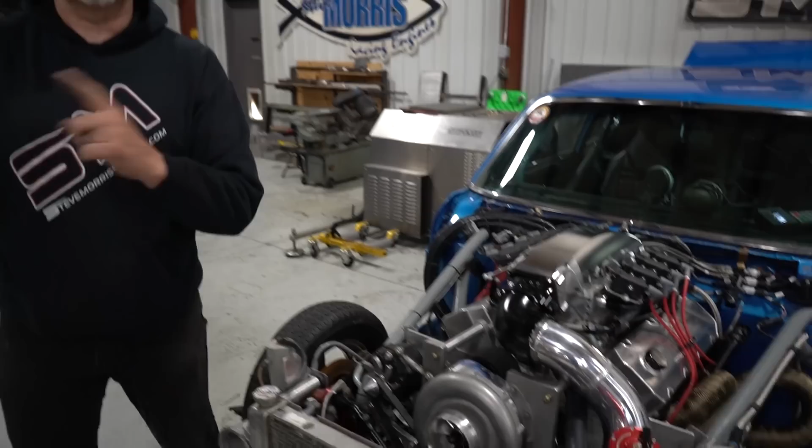This is an engine we already did for Ron Westner. Ron came and picked up the engine off the engine dyno. We did everything - this is an F2 reverse mount 540, and this was a nitrous engine conversion. We'll put a link at the end of this clip so you can watch the actual engine dyno video. Then Ron takes it home and puts it in his Nova. He's had this for a million years - it's his pride and joy, and he does a lot of the work himself, which is pretty cool.

He brings it here, and there's a lot of stuff going on in this car, and he's having some struggles with it - just didn't seem to be running right. It's like, well, you took it with you off the dyno and it's running fine, so there's got to be something else going on. So I said, hey, just bring it over, since you're going to bring it over to have it hub dynoed anyways. We want to take a look at everything and make sure there's no little issues anywhere else. So that's what we've done.

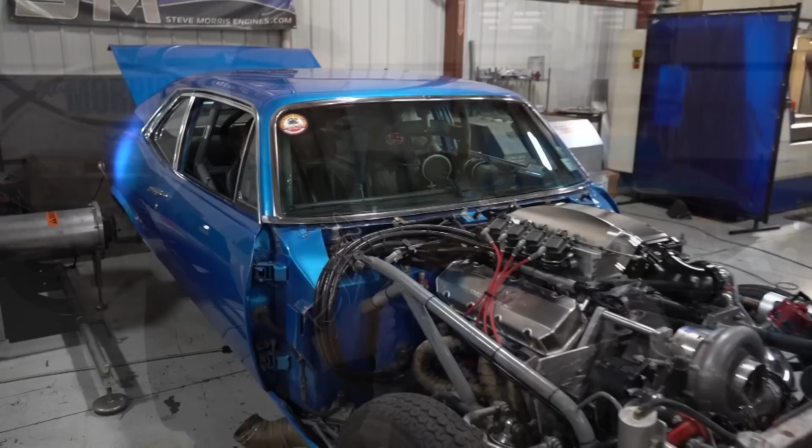This is a 540 cubic inch gasoline engine, C16, intercooled. Like I said, it was a nitrous engine conversion, and Ron brought us this engine with a whole bunch of parts to convert over, including the F2 reverse mount and this intake manifold with the built-in intercooler - a combination sheet metal slash billet intake manifold. Basically this is like our stage 2 package with a different intake manifold than what we'd normally do. F2, solid roller, just a good overall general package. You can check our website to get a gist of what's in a stage 2 package. Coil on plug, Holley EFI.

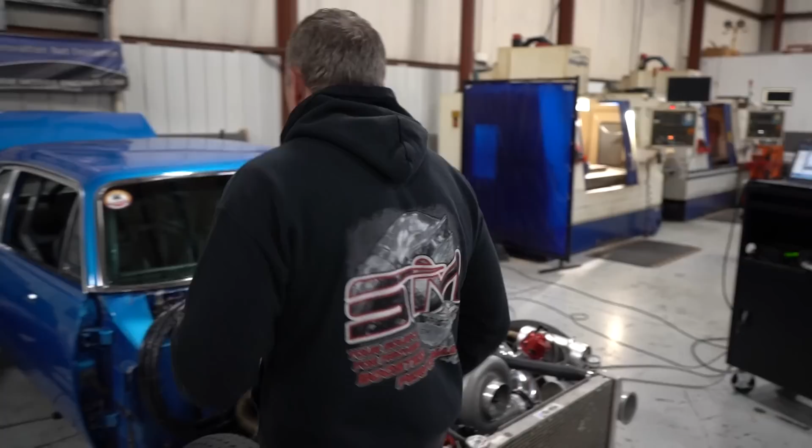You can see there are lines and lines and lines and more lines in this car - a lot of stuff here. So when Ron brought it back to us, I cleaned up a bunch of things. I remade a tube for him, redid the coil mounts, and cleaned up some of the fuel system plumbing and coolant plumbing.

And now we're in test mode, so let's get testing it. We've been going over this and wanted to show you a couple really interesting things. So before you check out thinking this video looks boring - we're going to dyno this thing without a bell in race mode, with the bell in race mode, and then since this is a street strip car and he wants to drive it, we'll run it on a little filter for the F2 we've come up with, so filtered. This also has cutouts, so we'll do open exhaust and then full exhaust out the back. I'm going to show you the differences in horsepower from open headers to bell, full race mode, open headers to filter, and full street mode. Should be pretty interesting, so stay tuned.

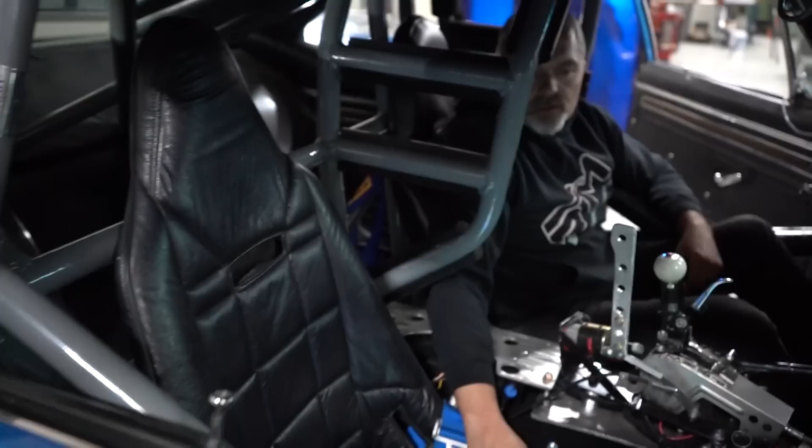Alright, so that was the first pull, open exhaust, no bell. This isn't exactly the way I gave it to him - I dynoed it with the bell on originally. It's the exact same tune-up. All I did is download the exact same tune-up we had before and put the same sensors back in it that were originally there.

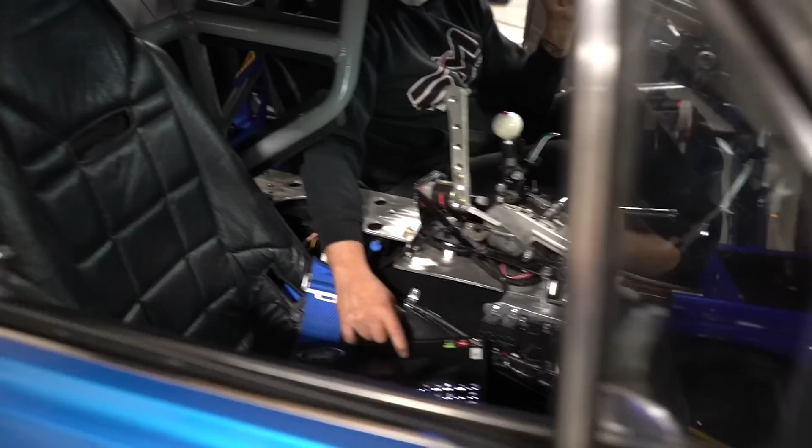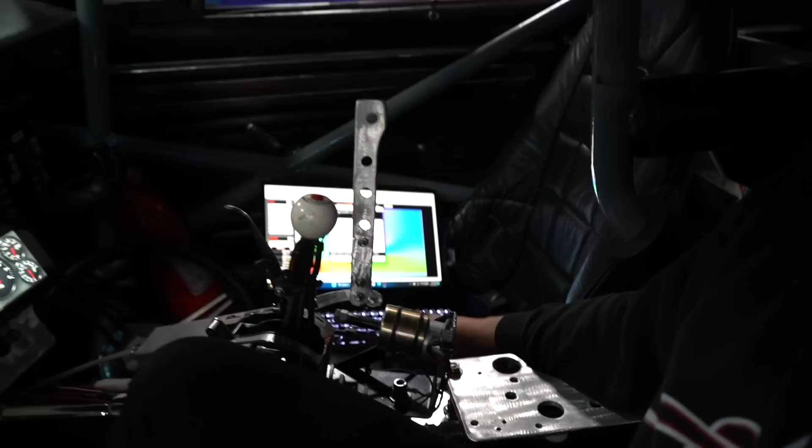Let me download this data log. Open the data log, take a look - you can see up there on the screen, it made 1466 horsepower. I'll show you that in just a second.

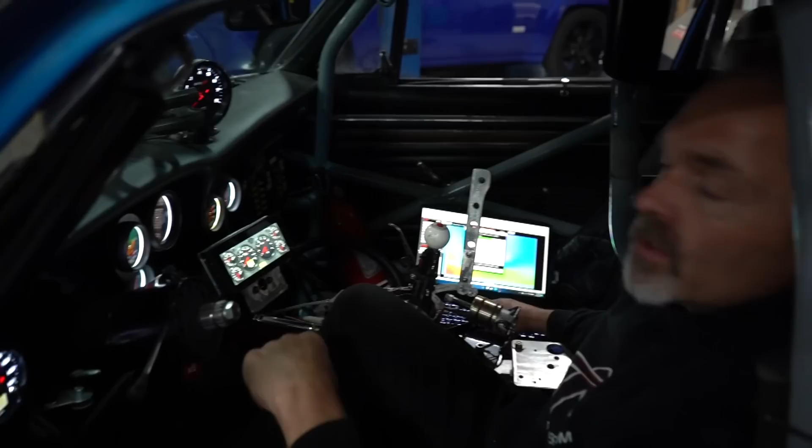So we're going to come out here, put the bell on it, and this will be exactly the way I gave it to him off the dyno.

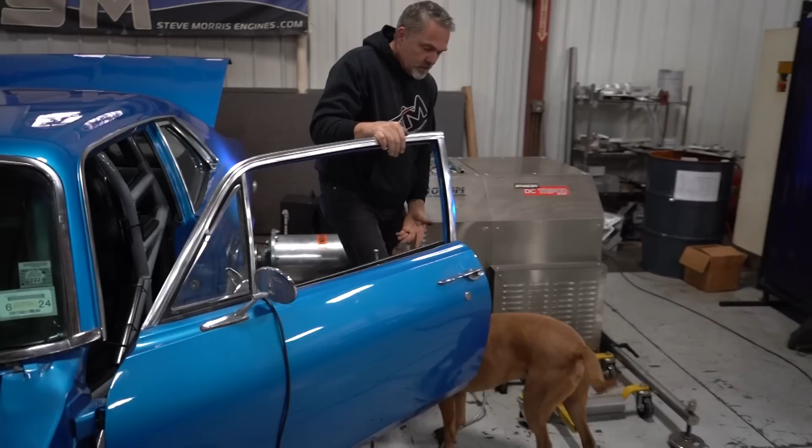Back up, back up - I can't work with you standing here. That's not what you do.

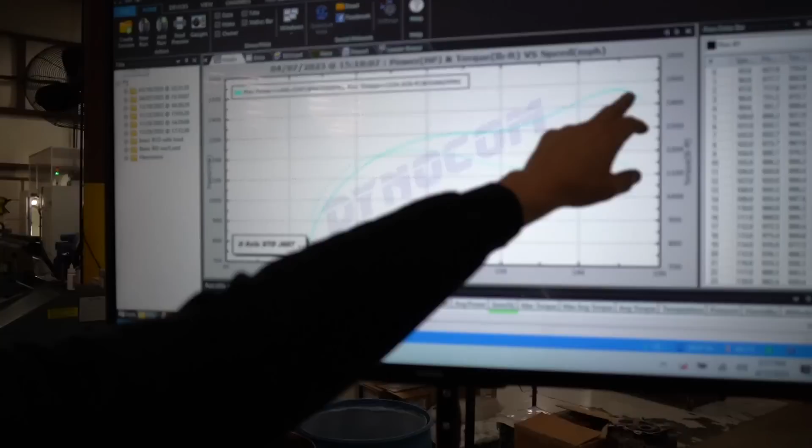Alright, let's see here, there we go - a little up through there. This is probably where the converter and stuff is starting to come through. And this is just me letting off the throttle up there, so that looks right, everything looks good. So let's put this bell on.

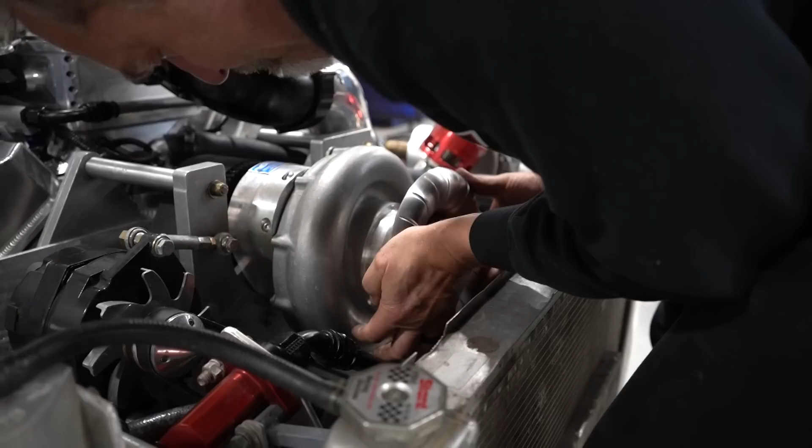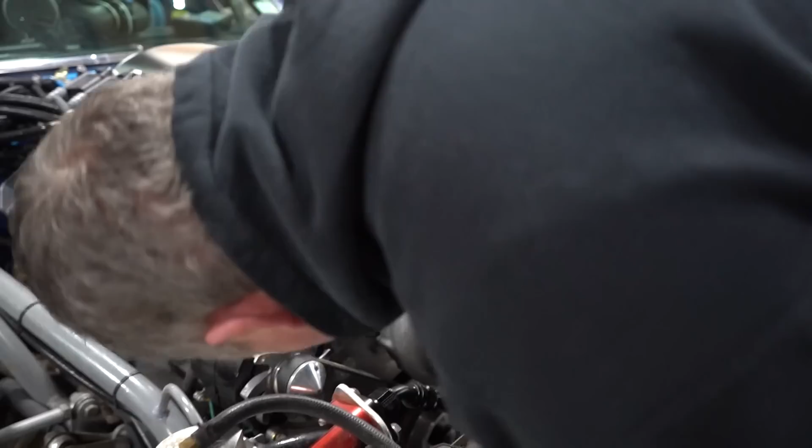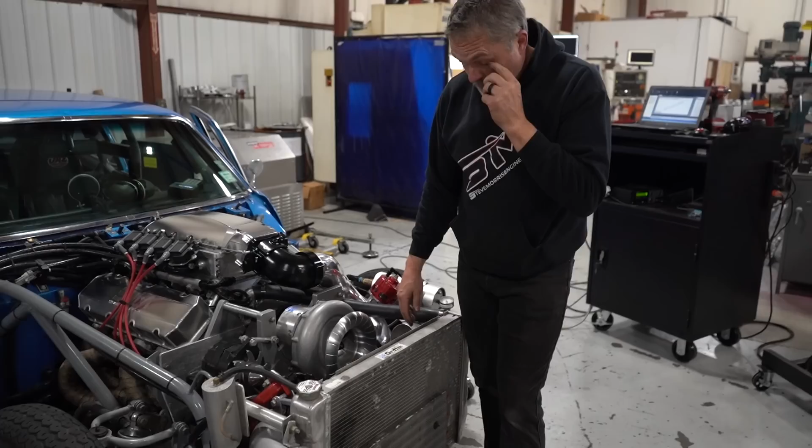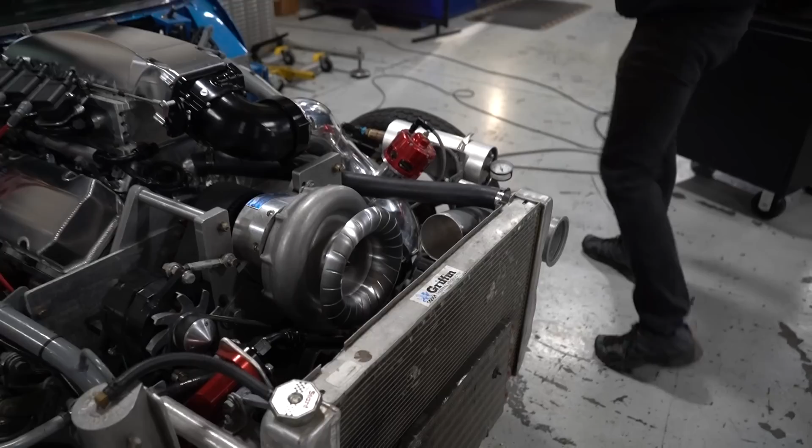Now, obviously this isn't ideal, sucking out of a radiator, but it is what it is. He has some fresh air stuff he's trying to do here. You're not going to get away from it unless you split radiators and do some other stuff, but as he's sitting right now, it is what it is. So no changes - all we're going to do is make a pull with that bell on it.

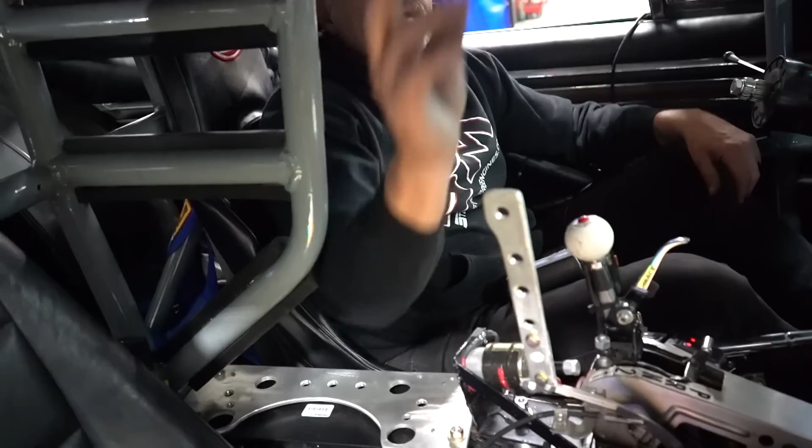So what I just did is I put in a safety for him, and I must have hit it at the wrong number. Ron has both a fast and a slow speed - that's one fuel pump, the race fuel pump. If you forget or just happen to not turn one switch off, or your second switch goes bad, this thing will run with one fuel pump on at low speed and burn the engine up. I don't ever recommend having two-speed pumps on it - anything other than this, don't have it on switches, don't put it into the tune. One pump, just let it run wide open throttle, it's never going to hurt it, no big deal. Or have some kind of redundant thing that's always on no matter what, if it's making boost, something like that.

So what I had done is I set a timing retard on it to enable if it didn't hit peak pressure, and I probably just set it up wrong, because it obviously didn't have any timing in it, and it wouldn't even rev up. So let me download this data log real quick here, and I'll change that, and then we'll make a hit on it.

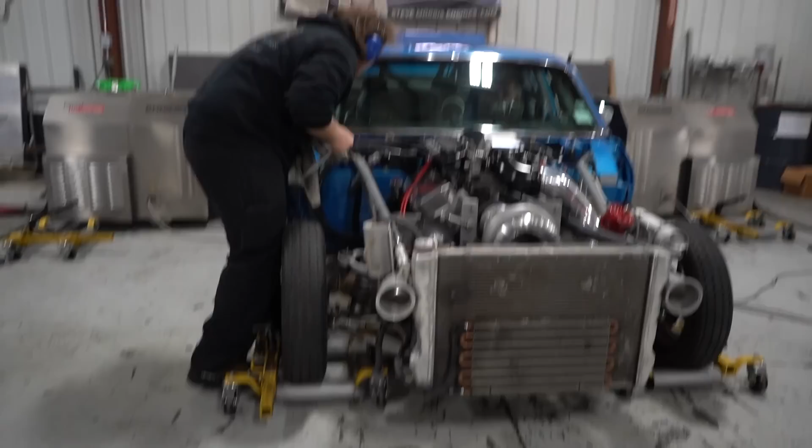Yeah, it's in the middle, not all the way up. It sounds like it broke. Yeah, halfway up, right in the middle. Yeah, it sounds like it broke. Probably transmission.

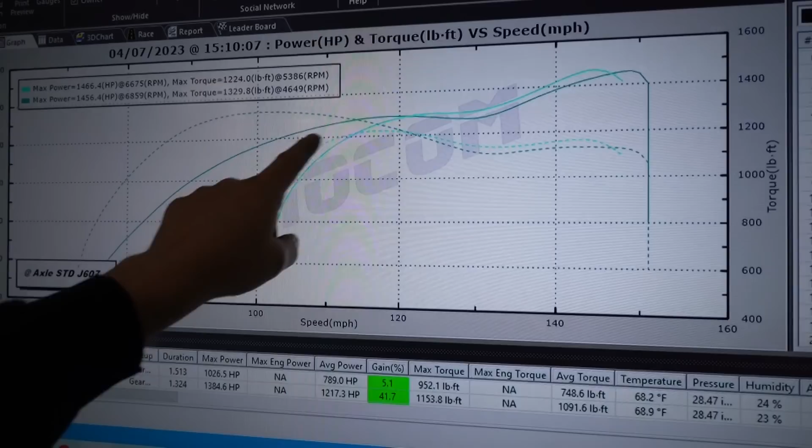Interesting, I'm gonna have to think this through, what's going on here. But with the bell, we had the one deal where the pull just went crazy, and then I came back into it and just made a short pull because, like, oh no, now it's all back again. It didn't come up on the rev limiter. So on that one, it's very close to the same - it made a bunch more torque down low at this lower RPM, way better down through here, and about the same horsepower up here.

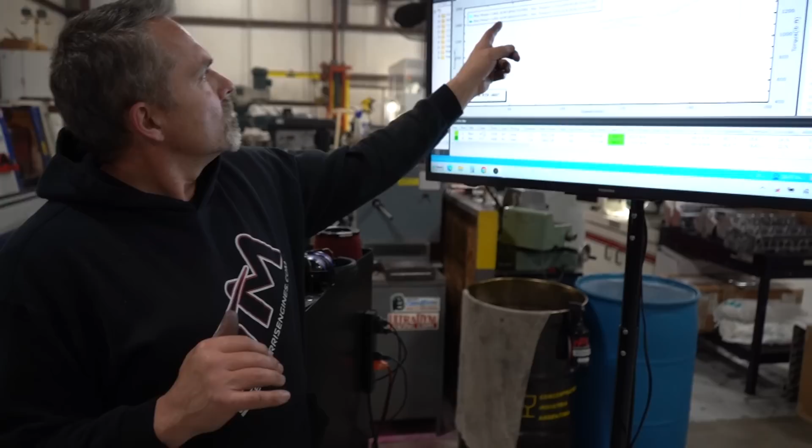So interesting - we checked the transmission fluid, and it looks fine. Then it made that pull again on it, so could be something going on there, but not 100% sure. It's basically the same horsepower - made 1456 instead of 1466. I did run it out a little farther, and it's just a little bit down there, but better back here. Not exactly sure why. I think there really could be something going on in the car here, not positive though. Anyways, I think it's close enough, and the engine still looks good, everything's fine there in tune.

Oh, I think we'll make a short pull with the filter on it and see what that does.

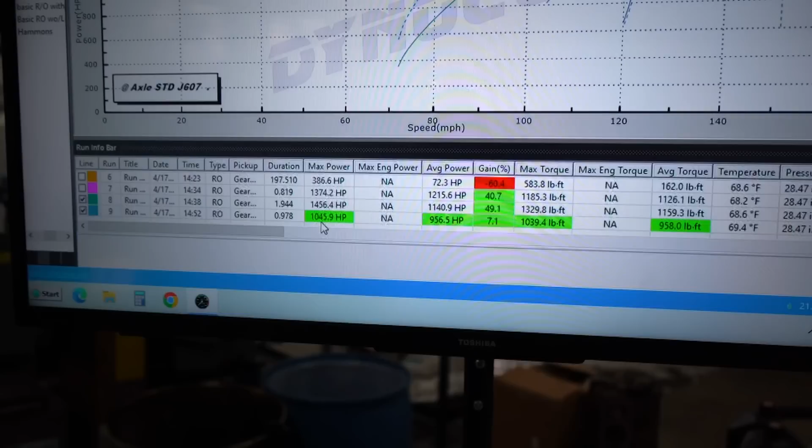Okay, so I pulled back short on it because I could hear it was not making any horsepower. I just downloaded the data log and I'll show you this real quick. So this is the previous pull with the bell, and this is with the air filter. It was only going to make about 1,045 horsepower - that is astronomically low, that's 400 horsepower less with the filter on it.

Now that is a small street filter, trying to keep things safe. So I think we'll just leave it, because this would be the street method. He had an air filter on it, and I'm telling you, this vibrant filter is better than the filter he had on it. But so you have a filter on it, and now we're going to do the turnout so it runs the full exhaust. Now he's got some issues with his full exhaust, and this full exhaust is the most restrictive thing I've ever seen in my entire life.

It is probably a little bit hard to see. Watch out, dude, watch out. Get back.

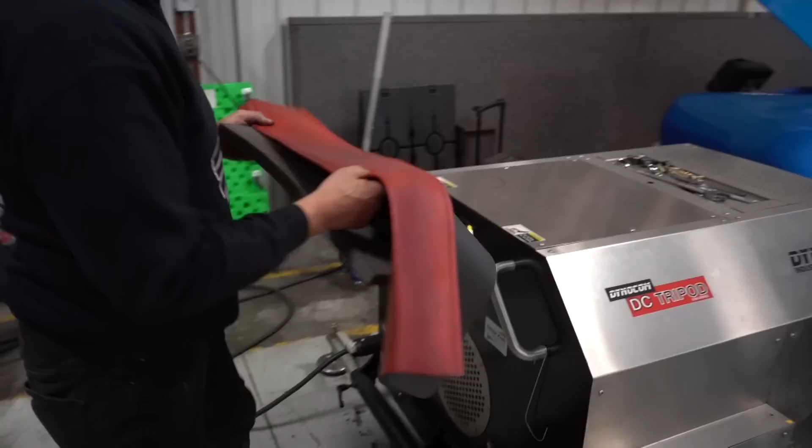But let's see if you can. I'm not sure if you can see up there or not. Oh, dogs gotta go everywhere.

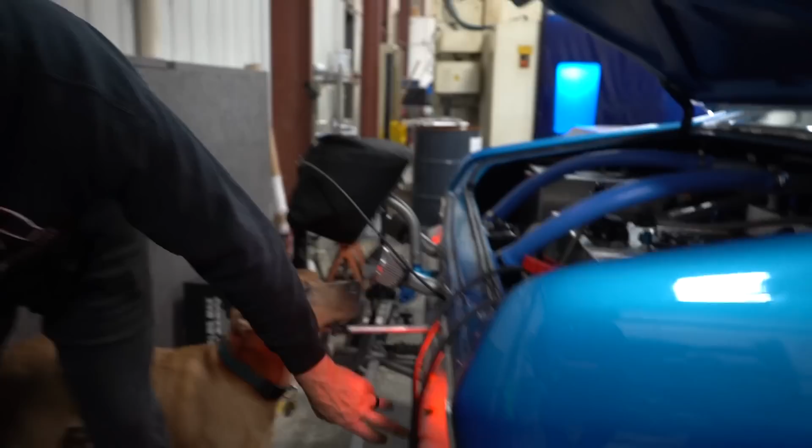So anyways, the exhaust does come all the way out the back here and right out through the bumper. Now he's gonna change something, but you can see right here, the muffler is all the way in the back, and it actually goes into two single round pipes, so it's literally half the header. You've got 4 pipes on your header, 2 pipes in the exhaust. I've already talked to him about it, he knows it's restrictive, he's going to change it and take it off.

But it's really interesting to see what this is going to do, because this is a really common mistake. People think that adding exhaust on your car probably doesn't hardly take any horsepower. No, they're wrong. We'll see what this takes. It's going to be kind of interesting to see. I'm just going to run it a little bit. I'm not going to try to run it all the way up to 7,500 because it's a waste of time and I don't want to do anything.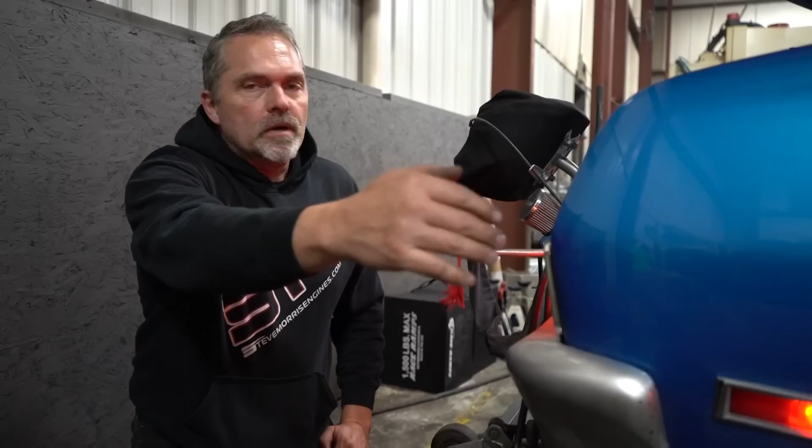Now he wants to take the exhaust off right at the front of the axle and see what it does there, so we might try doing that too. But let's see what it does full on exhaust, all the way out the back.

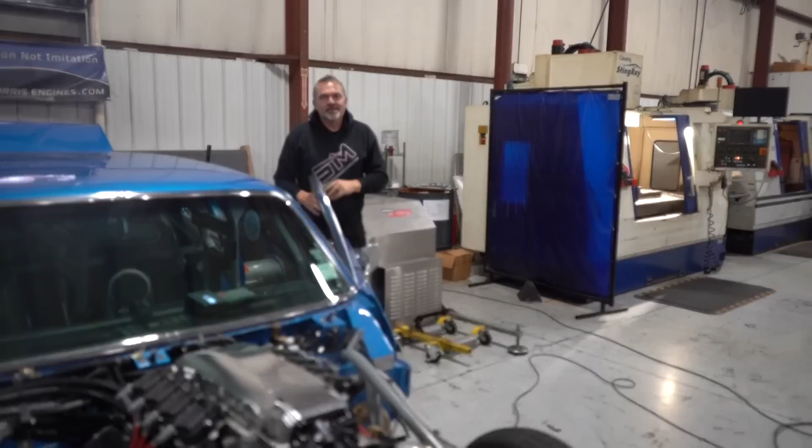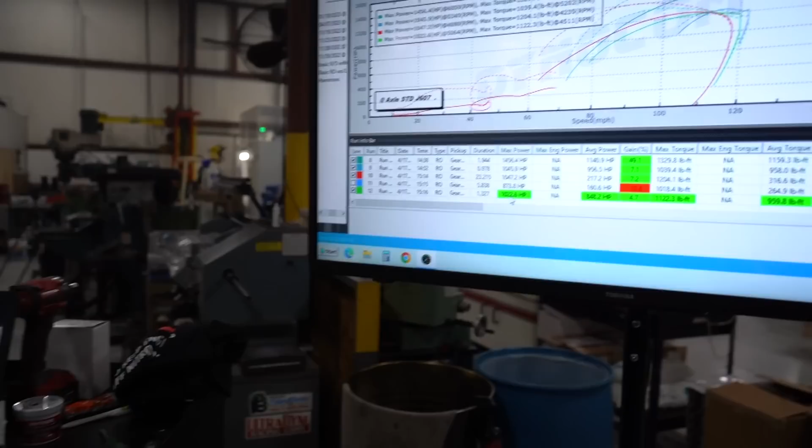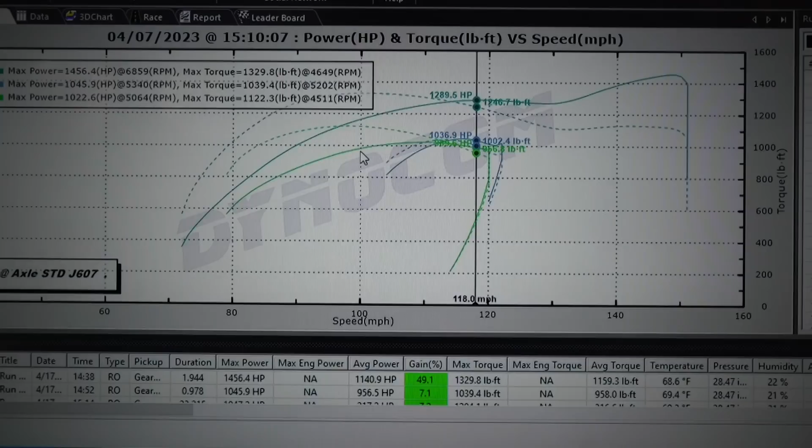It just zung right up, and then it sounded fine here. It lost another... not as much as I thought, and actually doesn't sound as bad as I thought. 1,022. He's still laying over, so that's where the air filter and closed off exhaust are.

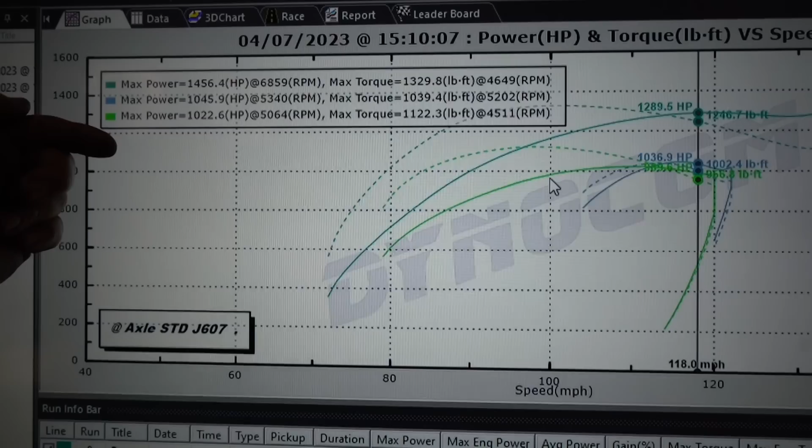So I'm actually going to say the exhaust isn't nearly as bad as what I thought, which is interesting. And it did do what you would think, it picked up a little bit of torque, which is probably correct. It is pretty interesting.

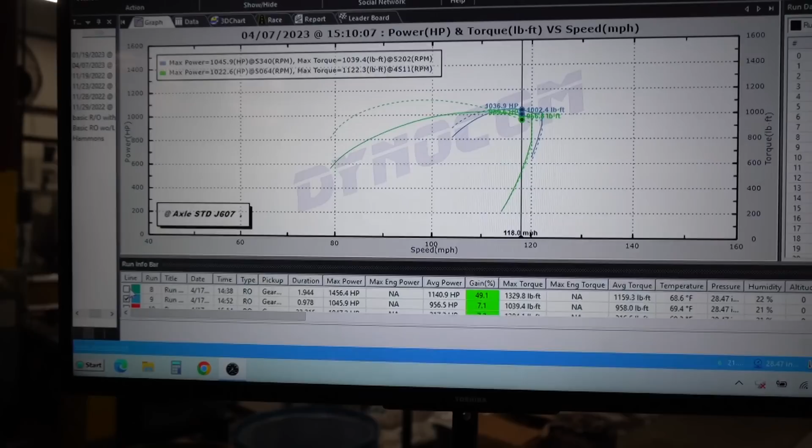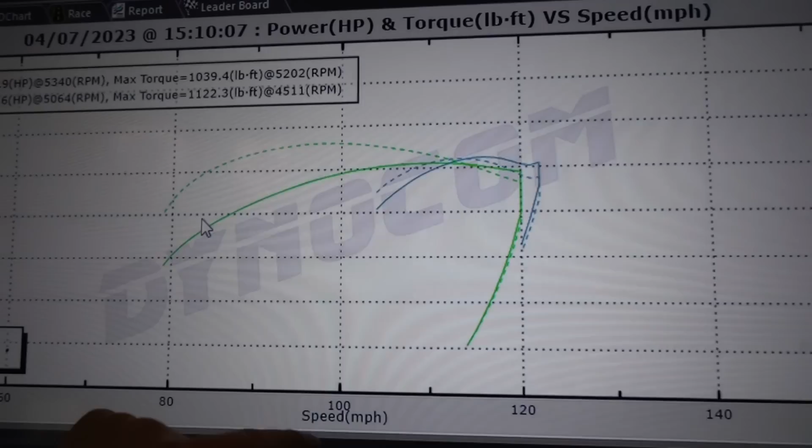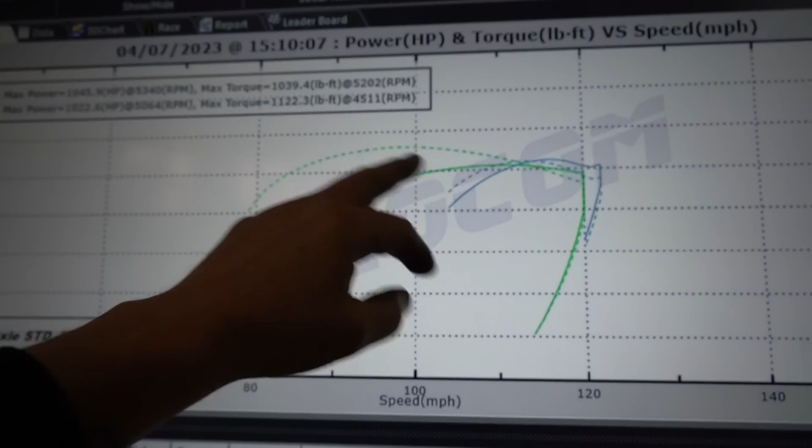So let me get rid of this other one here real quick. Get rid of that one. It looks a little funny because I'm not sure why it's overlaying graphs quite like this, but this was that pull with no filter, and this is with the filter and exhaust. So it picks up torque, which it should do. Still lays over. That is pretty interesting. Then say screw it, let's take the filter off of it and re-test it.

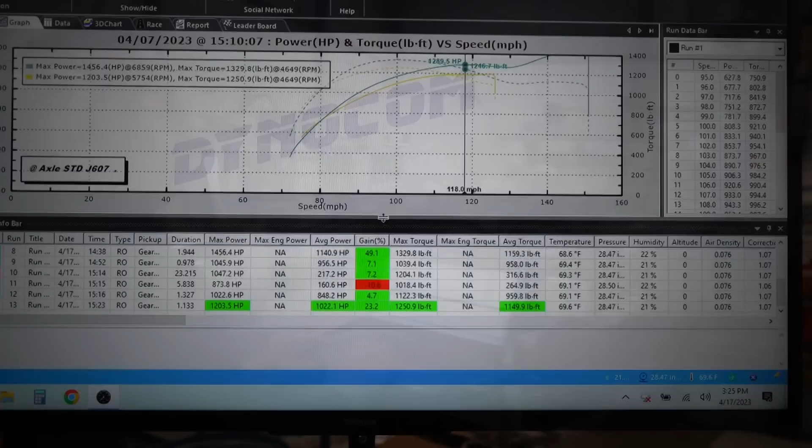Interesting. Now let's see, I didn't run it all the way out again, but it was a little bit better than I thought. So let's go down here and we'll overlay it. So this is no filter, full exhaust. Yeah, so it's pretty flat right through there.

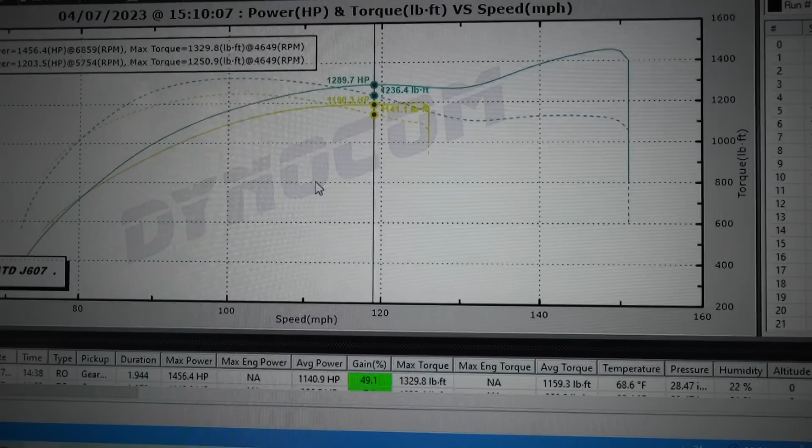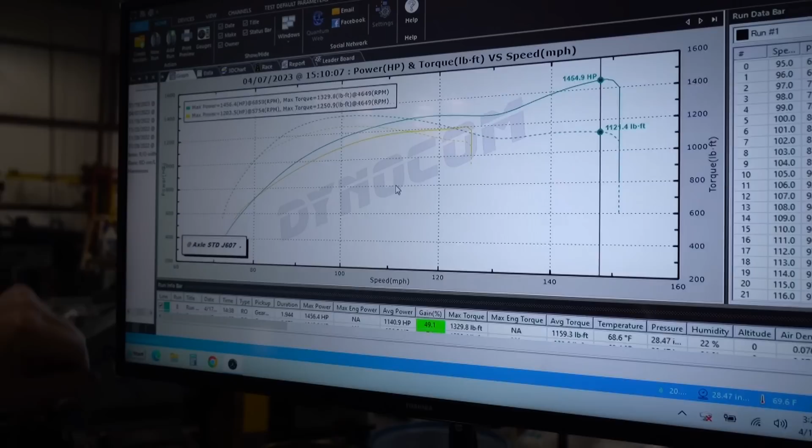So right in this area it is 100 horsepower off from full exhaust, and I'd be willing to bet, I just don't want to run it up that high because I'll take a look at the tune-up. It only is logical, it's got to move, the more RPM it's moving and the more horsepower it's making, the more air it's got to move, so it's probably going to start leveling off there. I'd say it's definitely going to end up being a minimum of a couple hundred horsepower off in that full exhaust. But honestly, I'm not going to lie to you, it's a little bit better than what I thought it was going to be. And I'll go in there and look at the tune-up and see.

But it's a pretty good illustration that the air filter is a big deal. I'm going to think about that, because I've been doing this for a lot of years, and usually filters are not worth that much.